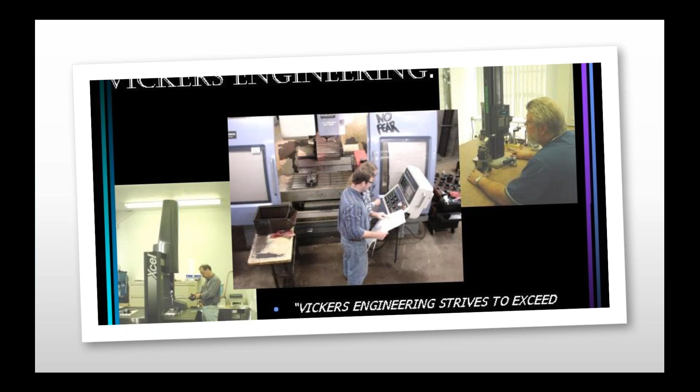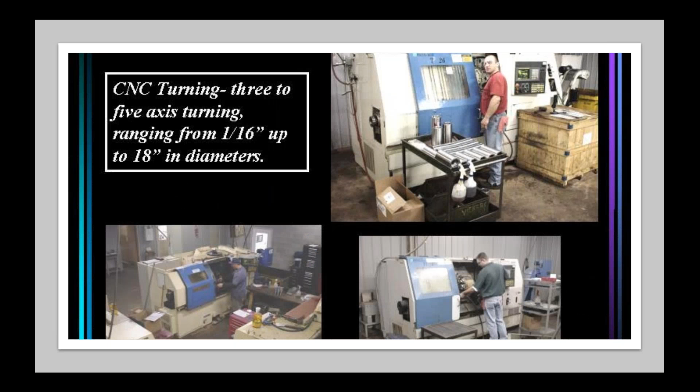You're going to notice there's a person in front of every machine, because that's literally how we worked. It was a little scrappy, it wasn't clean, arguably probably not safe. I don't think there were any people from OSHA on the line. That's me up in the attic, and Becky's our one and only computer person down in the office. Shared email - this is who we were.

This was in 2000, 2001, and we were still a good company, but we started to get some cracks and opportunities from our performance. We were again in that traditional machine shop world where you needed somebody to touch every single part, every single quality inspection, every single assembly. There were multiple people touching these components as they left the door.

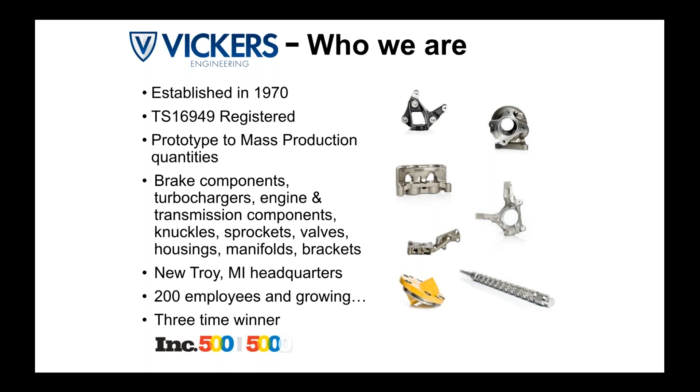Now this is who we are today. Flash forward to 2019, we're a couple hundred employees, really about 190. We're in Southwest Michigan, and again, Tier 1. We make a variety of components. We're still arguably a job shop, but we're in the game, and we've got a 10-year backlog.

Again, because automation got us into this game, we're relatively diverse, sort of. We ship all over North America, a lot of regular names many people recognize, where logistics doesn't necessarily matter for the type of work we do, because we're competing globally. Our competition is literally in Japan, China, India, down the street, and throughout the country. In this world, logistics cost doesn't matter at this point, but labor certainly does, performance certainly does.

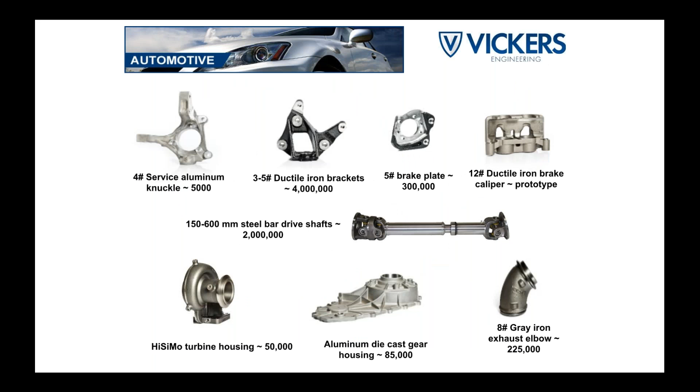It matters. So again, just a few samples of things that we make: oil and gas, some industrial things, a variety of volumes. Yes, we're in automotive, yes we make millions of components in certain commodities, yes we make the same parts every single day, but we also have different parts of the business that we don't, and they are significantly automated processes.

Oil and gas are families of components. We've got other shared cells that produce - sometimes we're running automated, sometimes manually, depending on the situation. And now we're in modular automation, which Corey's going to touch on later. Our competitive advantage is absolutely automation.

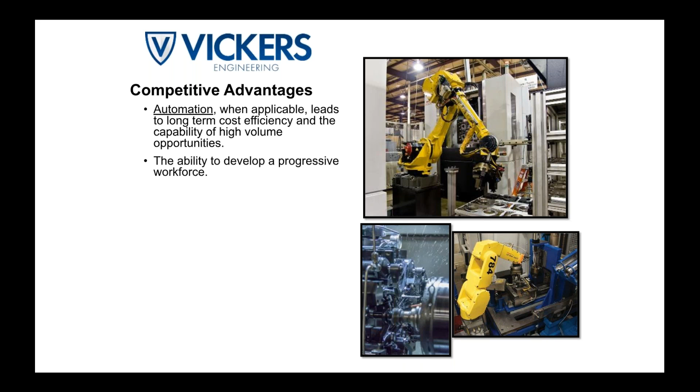Back in 2006, we were exposed to an opportunity where it was kind of a safety issue - it was such a heavy component we needed to automate the part. We had to move an entire fixture from one cell to another, and we decided to put a robot in play, and we were scared to death.

We knew nothing about robots. We didn't know how to maintain them, we didn't know how to program them. We thought our employee base was going to rebel. We were wrong on every single point, famously.

It was cheaper than we thought, easier to maintain than we thought, more reliable than we thought. Our throughput went through the roof. We had 3 people in a cell for 3 shifts because somebody was going to quit - it was a 2-man job. We went from 3 people per shift, so 9 people a day, down to 1 person a shift.

Our throughput increased about 20%. Our quality increased. And the biggest impact was people on the floor started to fight over who got to run the cell. It wasn't a rebellion situation - they embraced it more than we did. And then we thought we were kind of onto something.

So at that point, we started to quote automation in other areas of the building, and we were winning work because of it, because our cost was different, our performance was going to be different. And then in about 2010, we got to the point where we recognized when we were quoting opportunities, why it used to be, why would I spend capital and automate this process? Justified to the executive team, which was a couple of us, because we were still a small company. Why would we do that?

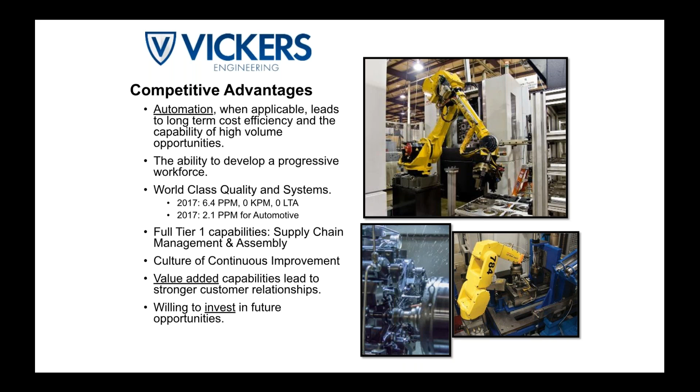In 2010, it flipped. It became a situation where justify to me why we wouldn't automate, because every single thing that we went through when it came to profitability, improving costs, improving quality, delivery, safety, the ability to add value, which is not only gauging from the quality perspective, but now being able to perform light assembly without adding labor, being able to do other things for your customer on a more repeatable, predictable basis. We were better. We were a better supplier because of this automation.

And so this is the core opportunity for, I'd like to say, anybody on the line. I don't care what business you're in, what industry you're supporting, what you're trying to do. If you improve cost, quality, delivery, safety, you can add more value to your customer to make you more important to that respective company. And you can start to attract a workforce that's not traditionally looking to come into your business, which we all deal with.

We've seen a room of people before, young kids. We've all said, hey, who wants to get into manufacturing? And 40 hands stayed in their lap. And then we said, who wants to work with automation? 40 hands went up in the air. So that's the kind of world we're living in right now. We are now attracting young people. We're attracting a different kind of workforce than we have for a few years now.

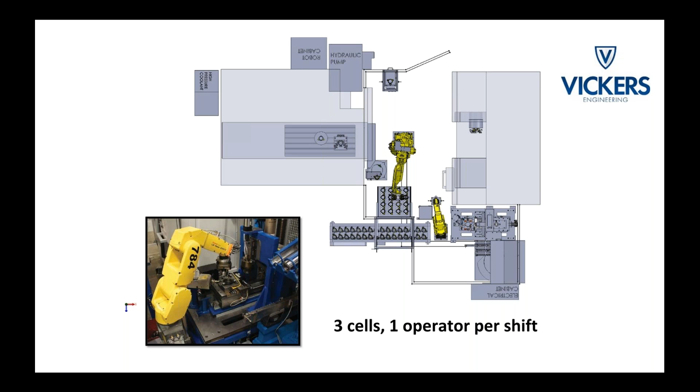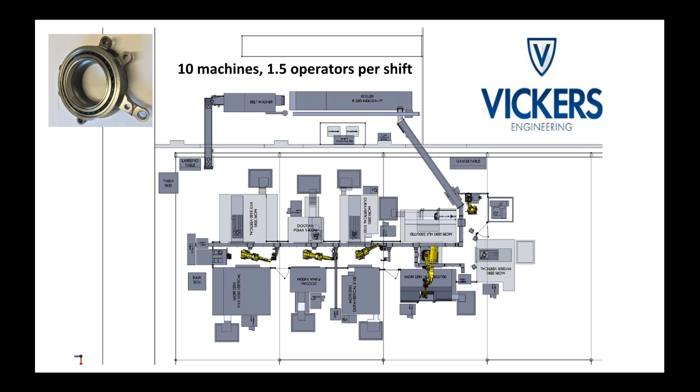It's pretty sophisticated. We also have a 15 machine knuckle line that's new on the scene for us, and everything in between. So the moral of the story is we do the simple stuff and we do the complex stuff. The bottom line is we wouldn't have been in the game had it not been for automation, and that's really helped us.

So this is our traditional model over the years. If you look back from 03 to 07, it's the traditional model. Our revenue was increasing, we crossed that $10 million barrier in 05, and our head count goes right along with it. So as we added equipment we were adding heads, and a lot of them.

It was in that 06, 07 timeframe we started to automate. In 09 everybody took a step back, of course, and our numbers followed with it. But that was also around the same time we were starting to add a lot more automated cells. And it's not a coincidence that from 2010 to 2014-15, we went up from 10 million to 35 million, but we barely added headcount. That's all due to automation.

The drop from 14 to 16 was a drop in oil and gas, but we continued to march upward. And you can see now we're in 2019, we think we'll be closer to 60 million by 2020 than we are today. We're continuing to march up, and our head count has ticked up to about 190 folks.

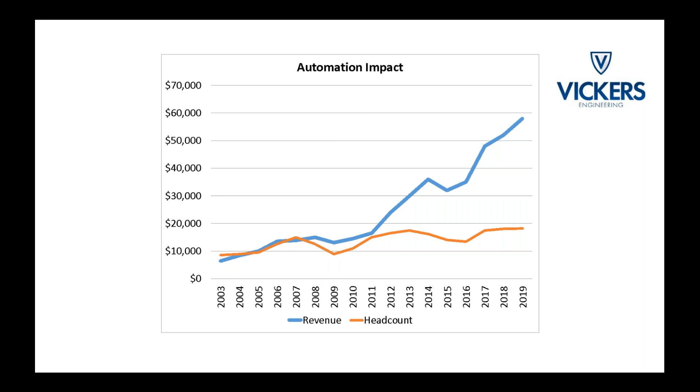This is the bigger slide. Yeah, we barely added head count, but it changed our business. Our payroll doubled. So what that means, how that translates, is the jobs are completely different. We went from having 75% of our workforce be machine operators. Today it's about 35%. Our average wage grew anywhere from 50% to 100%, depending on the position. We were adding positions that we never had before.

Automation support people, for example — now we've spun off RedRabbit. We developed our own internal automation team after years of doing it, and now we've spun those guys off, but we still have some automation support folks inside. It's not a coincidence — they're relatively young guys that know a lot more about this stuff than any of us with any gray hair. But we're bringing those people into the business. A lot of those positions are now support folks, program managers, salespeople, you name it. We don't need as many people on the floor doing jobs that we have a heck of a time filling because nobody wants those jobs on the surface. It's a great way to get into our business, but...

Matt, just to clarify — where was your head count in sheer numbers in 2007? About 160, 170. And today? We're about 190. So you've added 30 people. Yeah, net we've added 30 people, but the salaries they're making have doubled. And some of that is natural, of course — we've gotten bigger and better — but most of it's not. Most of it is that they're different positions now, and it's allowed us to attract a different caliber of person, which is probably the biggest thing. It's allowed us to attract young people into the business.

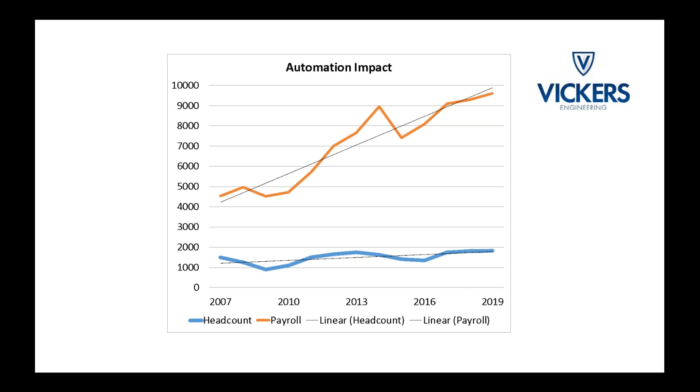We have no idea how anybody could operate any other way, but it's not just on the automotive side. That's what I have to stress to people, and when they walk through our facility, they see it. But go ahead and move on to the next one.

So that kind of gets us to RedRabbit. We spun off our internal integration team. We recognized we had a pretty talented group, and we recognized that we had a story to tell.

As I was giving similar talks like this throughout the country, I was surprised at how much interest there was in this concept, and how many companies didn't know where to start and didn't know how to do it. Quite frankly, we dealt with integration companies that didn't get it done, that really struggled because they were automation guys that would throw a robot on the floor and maybe kind of get it close to what they needed.

But at the end of the day, it wasn't a turnkey, fully automated cell, meaning it didn't close the loop. There was no gauging involved, maybe light assembly, or they didn't even fully understand hydraulic fixtures and loading and unloading. That's why Vickers developed our own internal automation team. We couldn't find a good integrator that understood what we did, so we did it ourselves.

RedRabbit's focus is that small to medium-sized company. We work with big companies too, but we recognize there's a lot of companies out there that don't have internal integration teams, that have machine tending needs, whether it be CNC machining, plastics, fab shops, foundries, you name it. Anything that is a pick and place environment from a manufacturing standpoint - keep it simple, but make sure it's a robust process. That's what RedRabbit is, and that's where our guys came from.

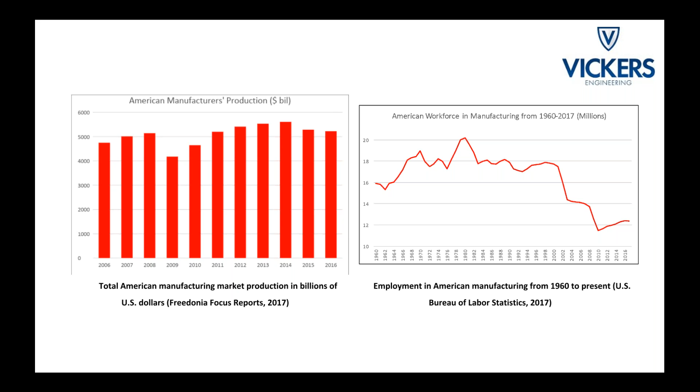Unemployment is going to be an issue. It's not like Matt had said—right now we're under 4% unemployment. People aren't available for throwing at a project you land, so you take the work that's out there and available. You really start thinking about how do I take on this next order, how do I increase my sales, and how do I move my business forward facing under 4% unemployment.

We missed the boat a little bit when we talk about workforce. We let the king of manufacturing, the king of technology, go out and sell milk. The dairy farmers are sharper than we are—they've seen it out front. We have to step back and say, how do we now get back in front of this?

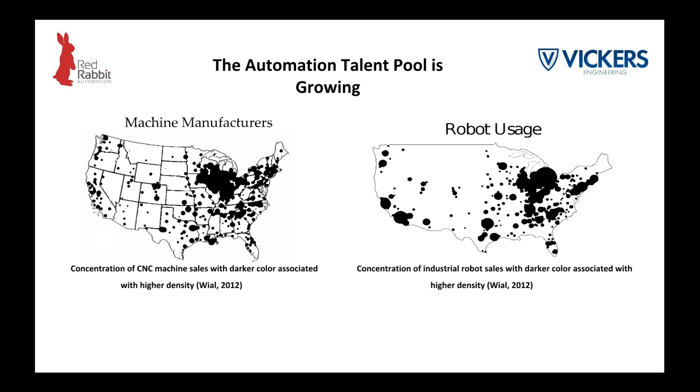So to Matt's point, you got to look at different places. You got to try and find those people that you can wrap the new culture and the new direction of your company around. We're huge supporters of community colleges. Folks up here in the Grand Rapids area are blessed with Grand Rapids Community College, forward thinking about what it's going to take for private industry to continue down this path.

Partnering with organizations like your LMCs, the community colleges, your Grand Valley State Universities, who are thinking differently along the lines of what the product needs to be in the industry we're producing from an automation standpoint.

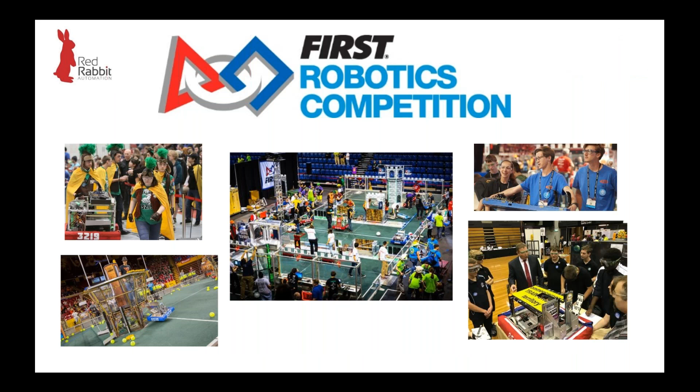I don't know if anybody on the line has ever been involved in this, but FIRST Robotics—the entire workforce that you're looking for is at one of these competitions. It's not that hard to show up there from a private industry perspective and find the future of your workforce being showcased in one location that will support the cultural change it will take to move your company from traditional manufacturing and machining to automation.

That traditionally scares people. How do I get from here to there? You just heard Matt say it was the scariest thing, taking the plunge and starting to automate and think cellular, starting the integration process of what people were going to do with this. We have a group of young people that are extremely talented and understand this already. We just need to figure out—you create a culture, you create a space for them to be successful.

There are a few questions that I'm asked every single time my team comes into a company that are similar to the folks on the line right now. What am I here for? I'm not here to automate. I'm not here to integrate. I'm here to improve cost. I'm here to improve quality. I'm here to improve delivery, safety, value add, and figure out the workforce problem.

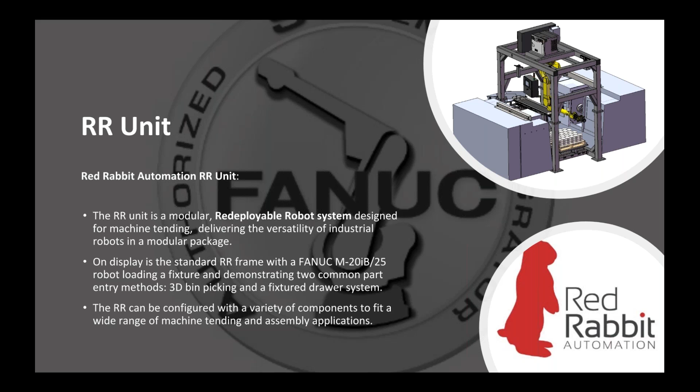Some of our automated cells were gathering dust in the downturn a couple years ago. So they came up with this concept that you can pick this whole unit up with a forklift and move it. So within about a day, we could have access to those machines to completely do anything else - move the automation stand somewhere else, reprogram it in another cell, you name it. It was a pretty novel concept, but now we're seeing it used on a variety of scales, and we're cutting through that integration cost - you don't have to pay for it multiple times, you pay for it once.

I mean, and that kind of changes the game, right? In terms of financing and in terms of how it looks on your balance sheet, because all those other things that you were spending were just expense. They were- this is capital. Not 100%, we're developing a dealer network throughout the country where this is being treated like a machine.

Like a CNC machine, where people can just buy the unit and program it themselves, create the end effectors themselves, do whatever you want. The unit itself has... I'm stealing your thunder. No, the unit itself- no, I like to talk.

The unit itself has a tremendous amount of application possibilities. You can put a vision system on, you can put drawer systems, you can string them together, run a walking beam underneath and use them as an assembly line. But it's modular, it's scalable.

You can pick it up and move it around, but it's an asset - an asset that you can put on eBay when you're done if you want to. Somebody's going to buy it. We'd buy it, Vickers would buy it. So it cuts through a lot of that fear.

The robot is inverted, so the floor space is smaller, it's more compact. There's a lot going on there, and it's not just machining - it can be in a fab environment, it can be in a foundry environment where you're doing polishing and grinding.

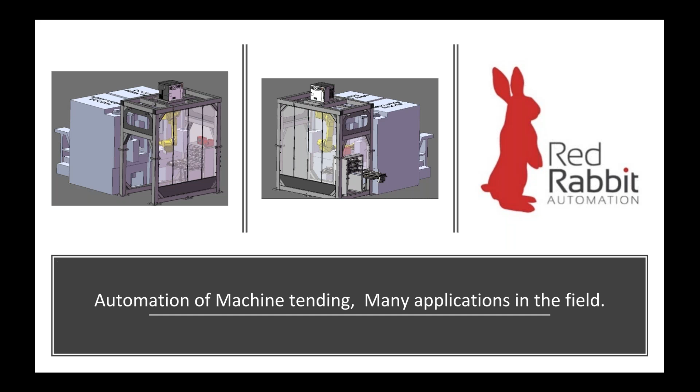From an integrator standpoint, having the ability to educate the culture of your environment to start thinking along those lines is the win for us in the industry. I've led into my own next slide - nice segue. Many part numbers, no high quantities of parts.

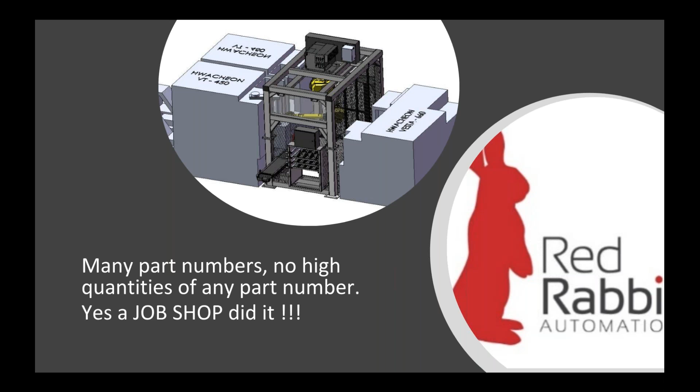Yes, it's a job shop. Yes, job shops can do it. Job shops can be successful at it. It allows you flexibility, allows you for change. It gives you the ability to value add.

What do I do with the space? So we have an application - you have a robot that's loading and unloading maybe 2 or 3 machines, and there's maybe long cycle times. So what am I going to do with that robot? What's the part doing beyond the robot or the machining?

Like you've seen in the cell back that Matt showed at Vickers, there's assembly that takes place, there's inspection that takes place, there's deburring that takes place. All those applications are basically human touch processes that are put into a unit as part of a cell that now becomes profitability, productivity, elimination of the day-to-day operational stuff that people don't want to do anymore.

And now you train a guy to run this unit and pay them more money for the value of what they're doing here. It's a game changer.

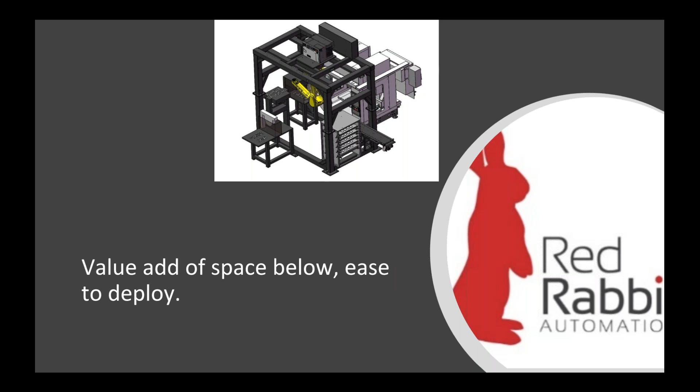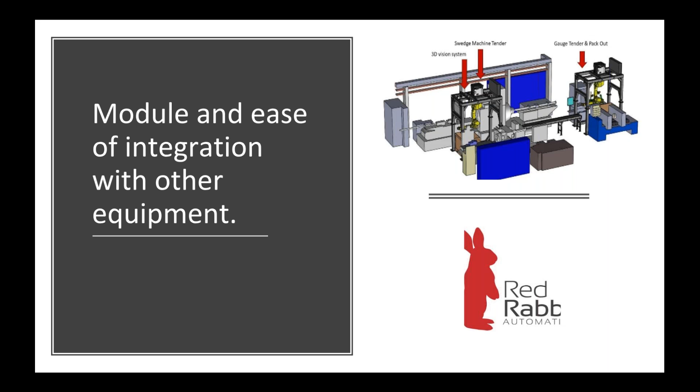Good stuff. From a perspective of, you say, oh, I'm not a machine shop, I have other applications, I have other machines that are my primary function - the redeployability, the ease of integration, it comes from having everything basically encased in a unit that has the ability to move. This piece of equipment here is serving as a machine tender for other areas.

To be quite honest with you, this unit right here is a unit that was produced - the concept of the RR unit is machining a porta-john frame. The door, it's the door to a porta potty. So if you're out there saying I do something totally different than machining, this isn't an application for me - that's why I put this slide in here.

There's increased production, the workforce introduction. Traditionally, this customer spent about 15 minutes to produce this product to the point where it moves on to the next step. Through the automation of this process, it's done now in 2 minutes.

The key here is that it's ease of training for the operation. The HMI panel that you see up on the left-hand side is very visual basic. It's very user-friendly, very interfaceable. The operator essentially has a step-by-step process to teach them how to continue this moving forward. It's the whole copy machine concept.

If your copy machine quits working on you, a screen pops up and says there's a jam. Take drawer number A down, pull lever D, move the unit, boom, boom, boom, back together, you're up and running. Very, very user-friendly, very interfaceable from an operator standpoint, and increased production for this.

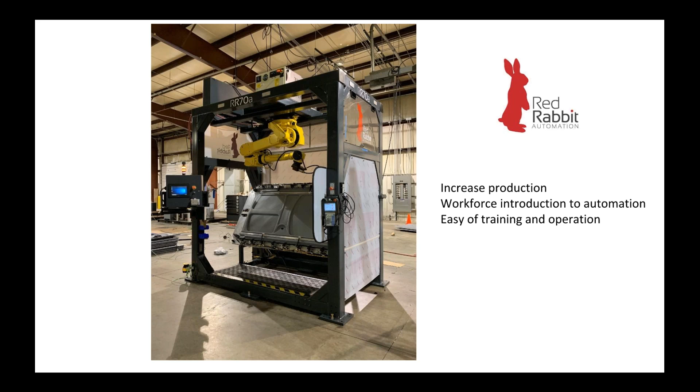Areas of focus all the time - we talked about this over and over again. Return on investment is essentially focusing on workforce safety, quality, and the ability to redeploy your asset. The RR unit asset becomes a purchased item that you can depreciate over a year. It's nothing different than buying a brand new CNC machine.

I want to show this slide because the module - I want to stop right there, that's critical. This is an asset, you can depreciate it in year one. Okay, we're to the point where we can get these financed. Fanuc Robotics is in the financing now to help. Aggressive banks like Key Bank and others are in the business of financing automation, which isn't always easy because traditionally there's not an asset there to actually collateralize - it was basically a consulting fee to come in and help automate. So there are things like that happening in the industry very quickly that is becoming accessible to us little guys.

And so that's a big deal in the decision-making process. Do the banks get it? I mean, you mentioned Key Bank, they're a huge bank in Cleveland, right? They're getting it, they're getting it. Some are already there, some aren't. But if you have a bank that doesn't get it, we can hook you up with one that does.

So, we hope that there are bankers on the line that are also interested in maintaining a relationship with their customers that want to grow in this fashion, and start the education process of - if your customer isn't thinking about this now and isn't moving in the direction of automation and integration, they won't be a customer in 5 years because the relevancy of them to the market is not going to be the same. So bankers all day long, start educating yourself about what it takes to be successful in the changing manufacturing world.

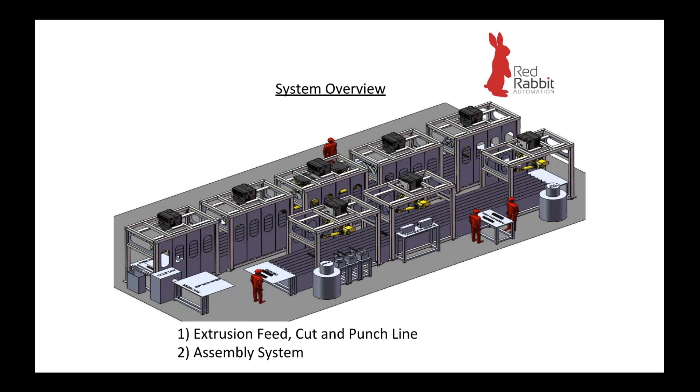Manufacturing is growing here and there's an opportunity. Whether it's CNC, a foundry, or otherwise, this stuff matters to a lot of our customers who aren't CNC guys. We want the bankers on board, because if they're financing CNC machines, they're not going to buy them if they aren't automated. That's the direction everything is going. It's got to be that way to be competitive and stay in the game. So we're trying to educate everybody to get on the same page and get on board.